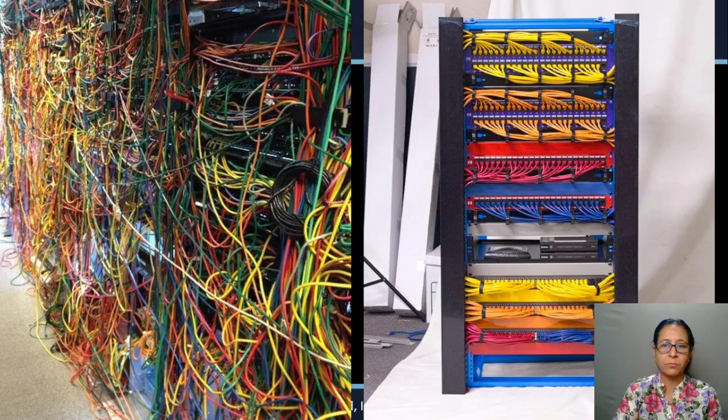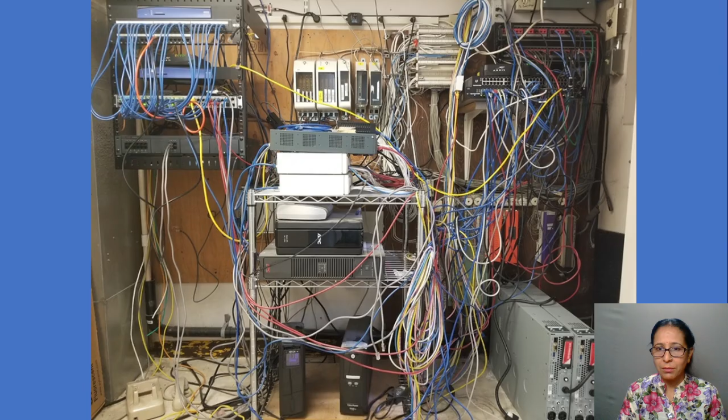Here is another example as well, suppose all these things are messed up on the side, you can see it's hell to identify where actually what cable is going in which way. When you nicely organize things, it's easy to identify. Here is another example, it's totally messed up, so don't do it. Organize things in a better way.

So the next phase is going to start with working on the actual topology design. We understood the requirement of our project, how many IP addresses we need, what network address we will use, what VLANs and how many devices we are going to use. Next thing is to start using something, yes.

So here is the software, this is Cisco's Packet Tracer. What we need to do is use this software to create our topology, and believe me, it is going to help you configure the things we have drawn on paper. So let me introduce this particular software, and then we will start working on it.

There is a logical mode where you will see actual devices. There is a physical mode as well. Once you click on the physical mode, it is going to show you there is a home city.

So we have two sites, we need two racks, two routers, multiple switches, we need cables, and we need to figure out the connectivity. You can also design it from the physical mode.

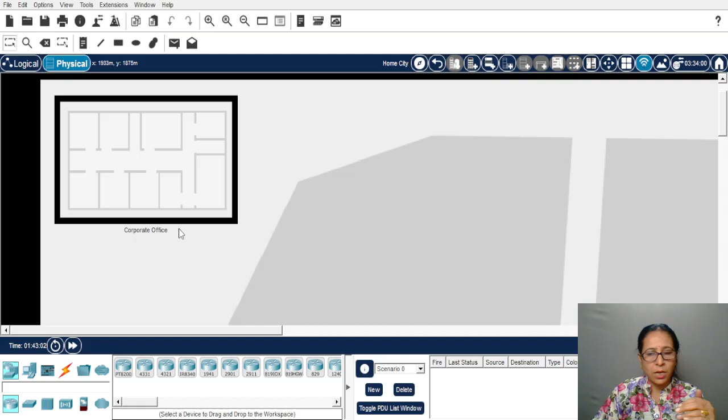So like here in a home city, when you click on it, we entered here. There is a corporate office, and when you click into it, you are now inside this corporate office, and you will see here there is a main wiring closet.

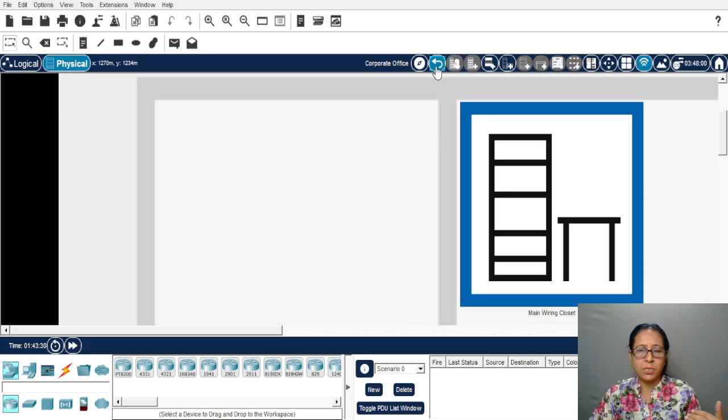You can place the devices here, or you can add more racks. If you want to go back one layer, you can click on this arrow button.

It's giving you one layer back. So we are on corporate office. You can also change the name of it.

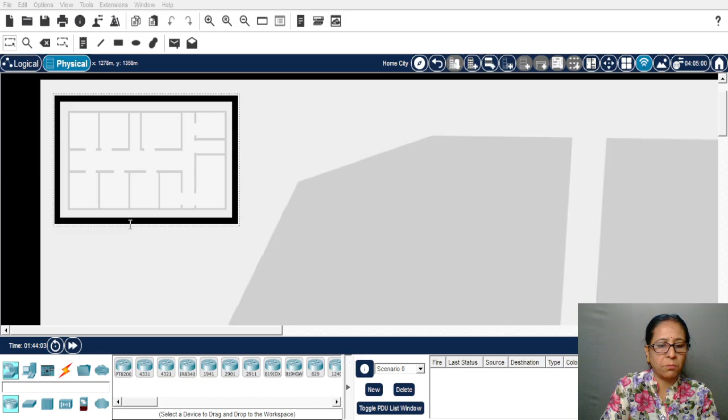Say, let's say Olympus site.

There are the buildings. You can also create the buildings. You can also create the generic container. There is a rack here, a new closet, and rack here inside. When you go, then you can also create racks here.

So suppose this is the build. Here, if you click, it's a container. We need to delete this.

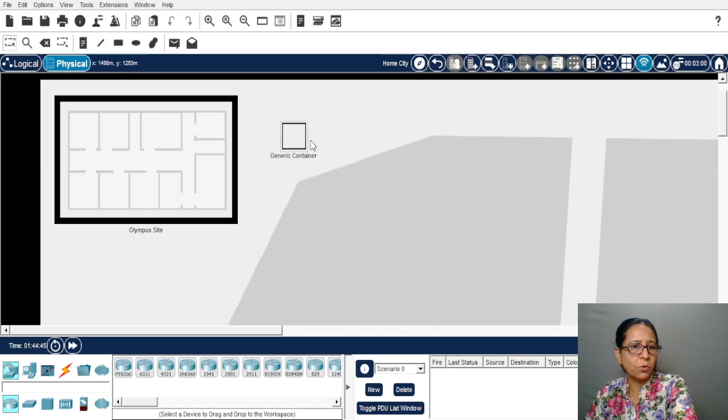So if you want to delete an item you have created unnecessarily, how do you do it? Either you can select the device and press delete, or there is also a delete button here. Click on it, and whatever item is selected, it is going to ask you, do you want to delete it? Yes, confirmation is there, you can delete it.

So that's the delete function. Then you will click here again to select the button. Otherwise, once delete is selected, if you click on another item, it is going to delete that as well. So here is new building.

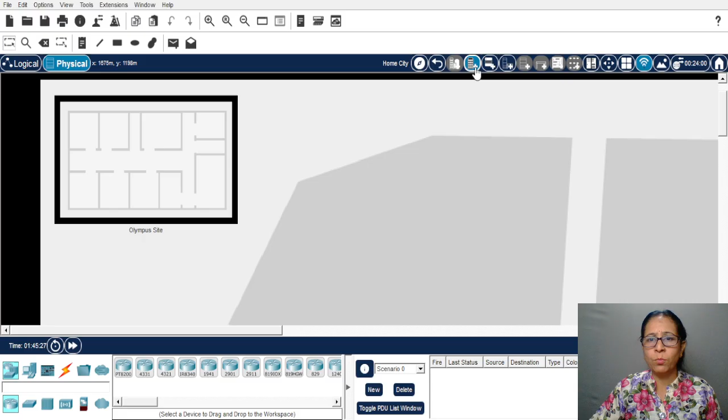If you want to create a new building, like we have Olympus site, another is office building, there is Atlas NX.

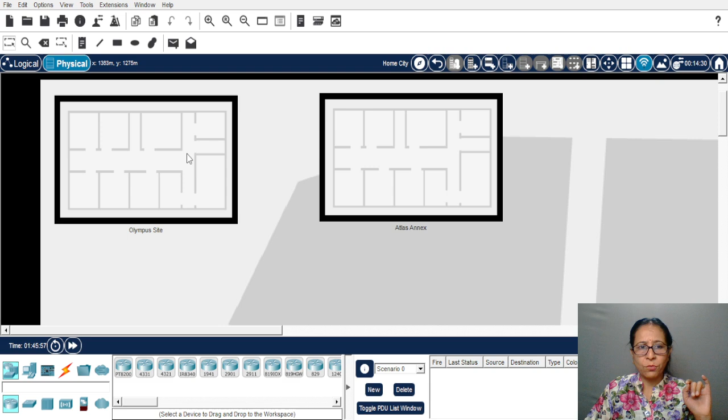Okay, this is now we have two buildings, building Olympus site and Annex site, Atlas Annex. So now suppose inside a particular site, when you click here, you can also add the rack. But what we need, we need here on Olympus site, we have three buildings A, B and C.

So on Olympus site we can give this the name of building A. Let me copy this name. We can also create another building.

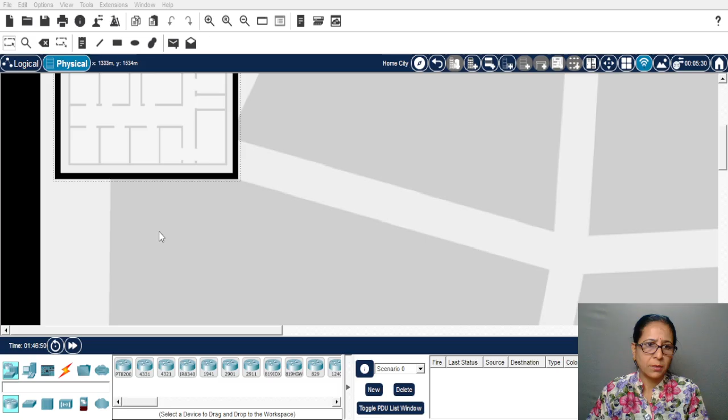Okay, building here B. Let me create another building as well.

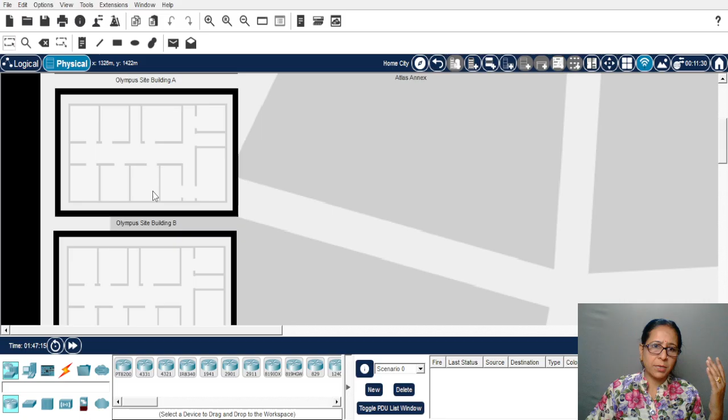When you click on the building, it will go to the top here. So you can drag this particular item and change it. So in the first phase, what we created was three buildings in Olympus site and one building on the Annex site, Atlas Annex.

Here is the way you can configure the buildings. We are on the physical mode. When we click on the logical mode, you are not going to see whatever building, rack, or wire closet you have created. On the logical side, what you will see are the actual devices like router, switches, endpoints, or wireless devices. You are going to see these on the logical side, not on the physical side.

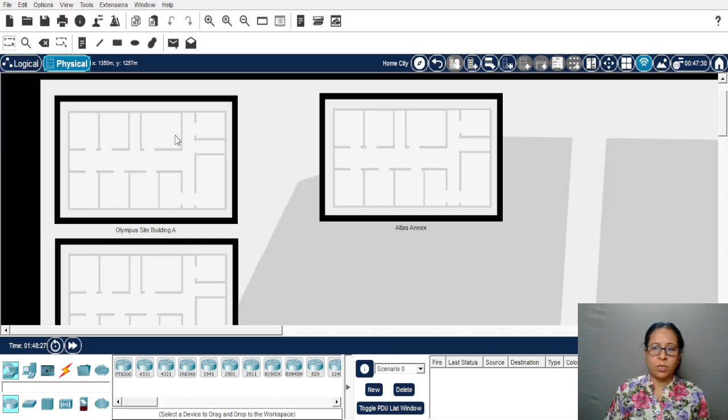But when you are on the physical side, it gives you a clear idea of what exactly was going on behind the scenes, what devices we have placed here in building A, B, C. So you can also start from here and configure in this way. I will also guide you how to configure the things, where the devices are, and what you can configure to achieve the objective of our configuration part of the topology.

So you can save the project, so that accidentally, if you click on close or power off, you will not lose your work. Keep saving the project at different stages.

Like in the first stage we have only placed the building, so you can save it with a name. Suppose I create a save, and I will save it with the name of NovaTech site.

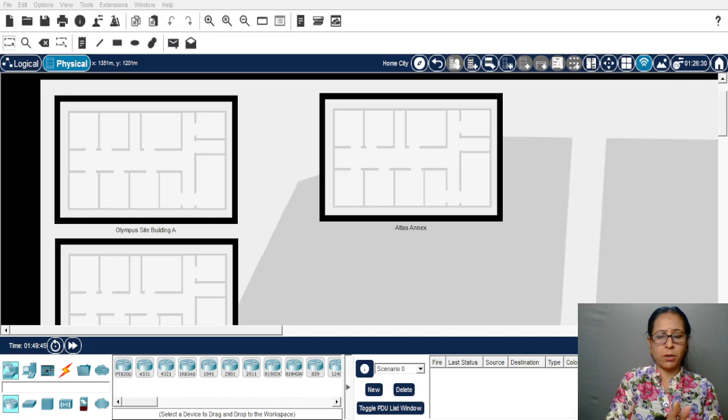I will save it with the name of building design, and I'm giving it the name. Suppose this is my first phase of it, okay, so like this way.